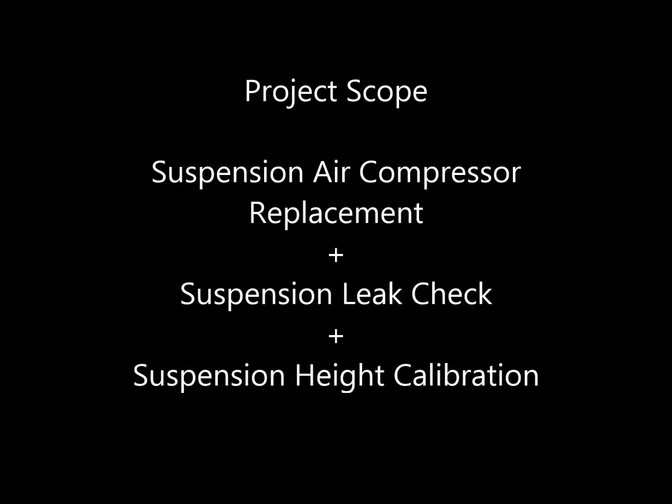My name is Dan, and in this video we will be working on a 2016 Land Rover LR4. We will be replacing the air compressor for the air suspension system. I will show you all the tools and all the torques and all the little bitty tricks and things we learn along the way so that you can do this project and do it correctly.

And I can already tell you that the diagnosis for this thing is really strange. We're finding things that really should never ever happen. So hang on, here we go.

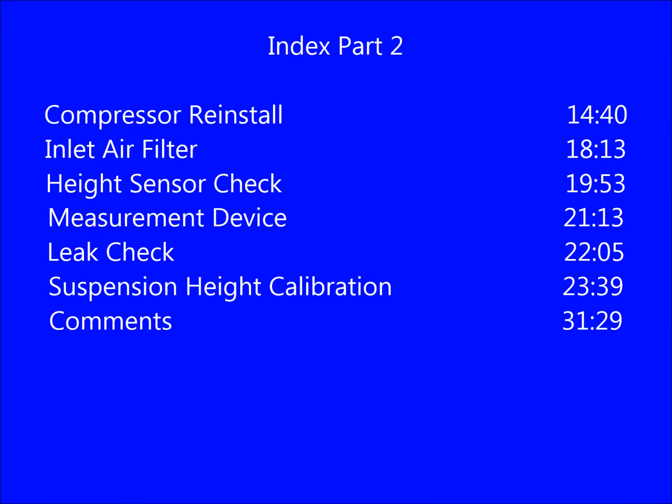Just a quick word about buying the parts. Be sure to understand what's in your truck before you buy your new parts. So the earlier trucks came with Hitachi pumps, and somewhere around 2012, 2013, they transitioned over to AMKs. Rover tells me that if you buy from them and you give them your VIN number, they will make sure you get the appropriate pump for your truck.

But if you're buying at one of our other vendors, where of course it's a lot cheaper, you need to know what you've already got. So if you're changing like for like, Hitachi for Hitachi or AMK for AMK, that's cool, away you go. But if you're changing brands, you need to make sure that you get all the new mounting brackets, because the mounting brackets are different. And if you change brands, you need to get a new relay, and you need to reflash the software. And to reflash the software, you need the IID tool.

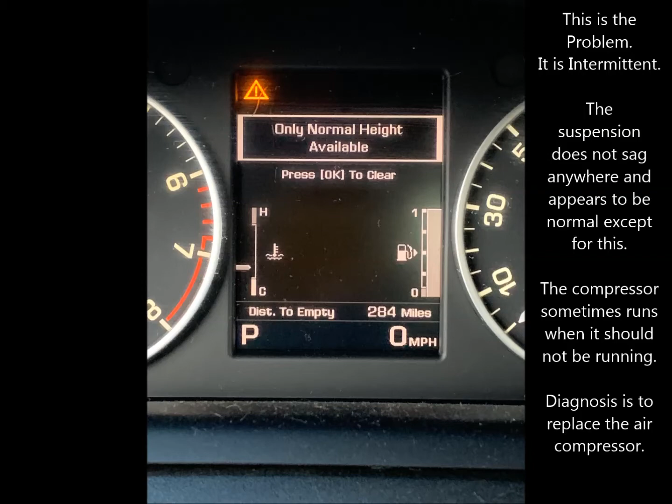Well, that's a surprise. Okay, so right now we are just doing a preliminary diagnostic. We just want to take a look at the pump. So to do that, just to get oriented, this is driver's side rear. When we do the actual pump, this wheel needs to come off. But to take a look at what's down there, we can do this real quick.

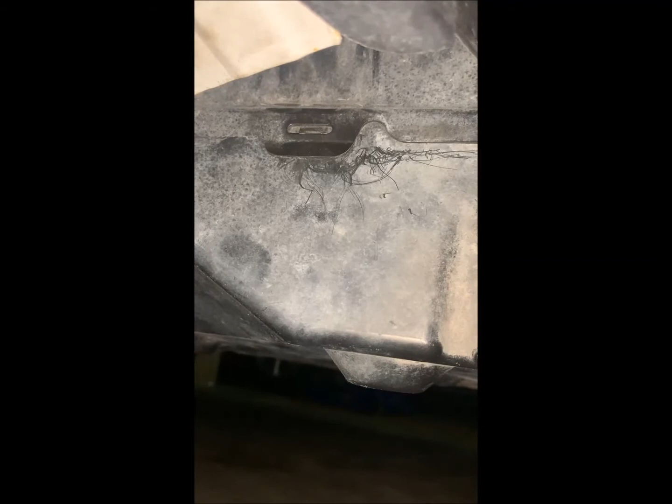Here's the case, and you cannot see it. Up there near that sticker, there's a bolt. Down here in the middle, shooting straight up, there's a bolt. And then around the back, you can see it right there. There's another bolt. And then there's these little clips. There's 5 or 6 of those clips around as we go. And let's just pop that off and see what's under here.

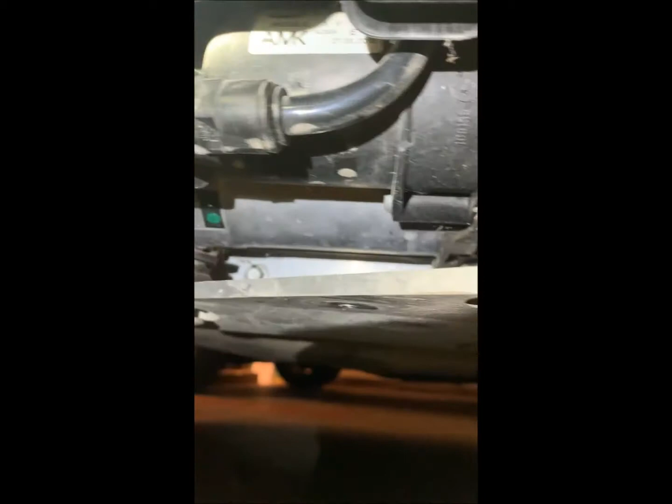Now it's interesting, I just showed you that the software comes up as Hitachi. And what do you think that says? That is most interesting. Let's go take a look and see what relay is up front.

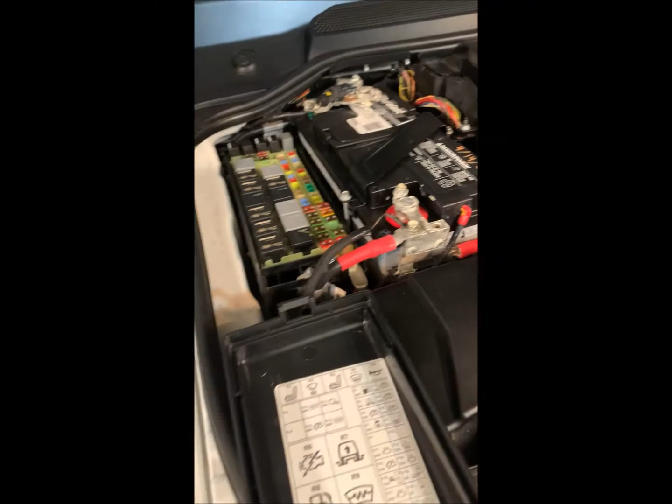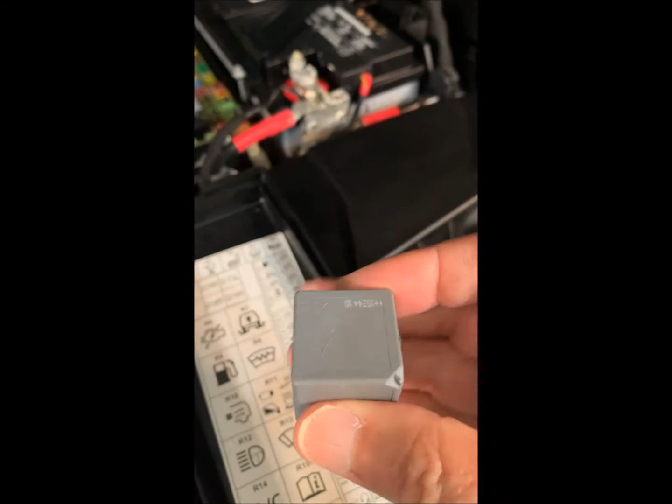Okay, so we've taken the cover off the battery and the fuse boxes. Here's our fuse box diagram. And you can see right there where it says R7, that's going to be the relay. And come up here, and right there where that relay is missing, that's our relay. Here it is in my hand. And this is the orientation that goes back in. This is the correct relay for the AMK compressor as near as I can determine. It's a 70 amp. There we go, 70 amp relay.

So that leaves us with the conclusion that either the software in the tool is incorrect or the software in the truck is incorrect. So now we move on and we talk to the folks who made the tool and see what they have to say. Okay, so we just learned that the truck believes it has a Hitachi compressor in it, and we know that's not true because we can take a look and see that it's an AMK. That's a real surprise, and I really can't figure out how that happened, and neither can anybody else.

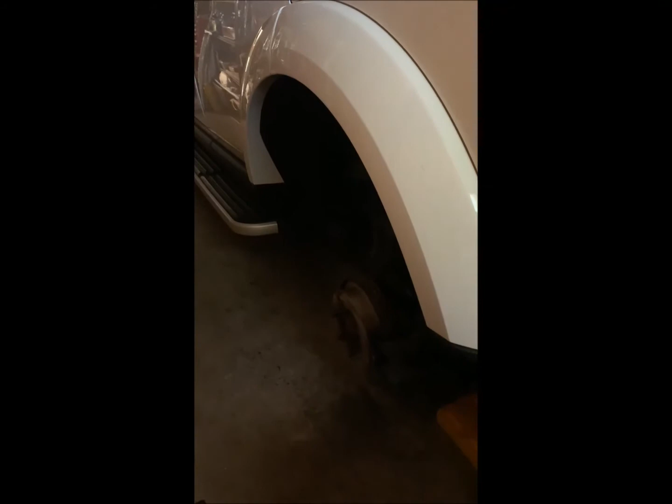So we are ready to start, and the vehicle has been jacked up and the wheel removed, and we are ready to go. I'm assuming you know how to jack up a Rover, but in case you don't, you put it down into access height and then lock it down. And then, of course, we are inside, so we can use the floor jack. And I have 2 jack stands underneath it today.

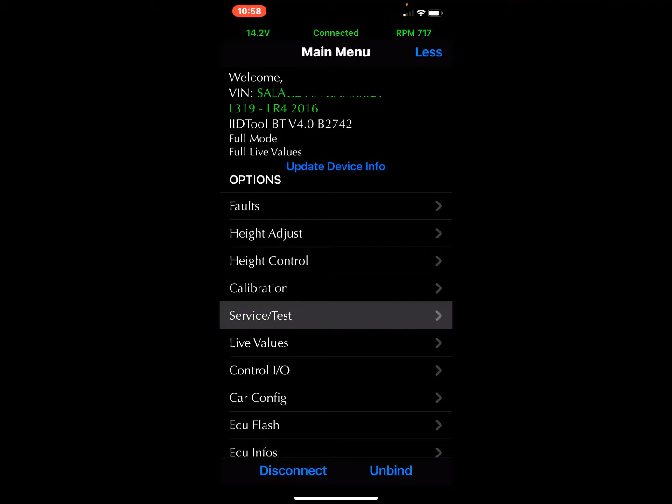Okay, our first step is to depressurize the entire system so we can open those airlines. I have not done this before, so let's give it a try. Okay, up here in the main menu on the top right, it says More. It beeps a suspension fault. And we're going to do service test, suspension, deflate. Yes.

Okay, looks good. You can see where that relay is missing. Take out the relay. Let's take off the case. And there again, there's 3 bolts. This is the one on the front. Here's the one underneath. And we've already seen the one in the back.

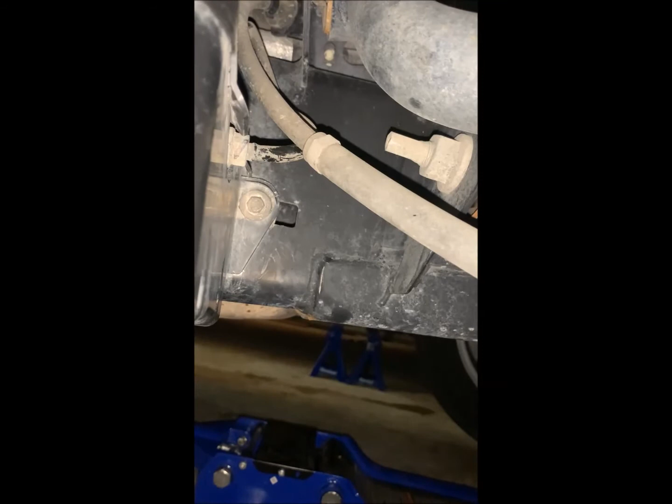These are all 10 millimeters and 9 Newton meters. 10 millimeters, 9 Newton meters. This is the only torque spec for this project that I can find in the owner's manual.

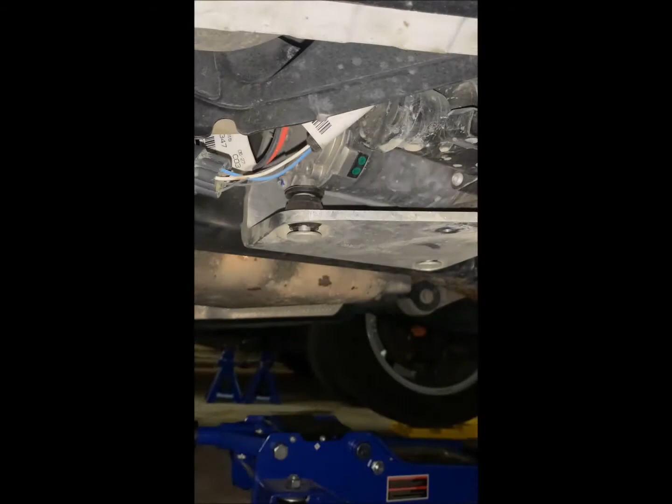Okay, so here we are underneath. There's the compressor. We have 2 electrical connectors, and these are not too bad. We push in right here on this one, and on this one here, we push in right there.

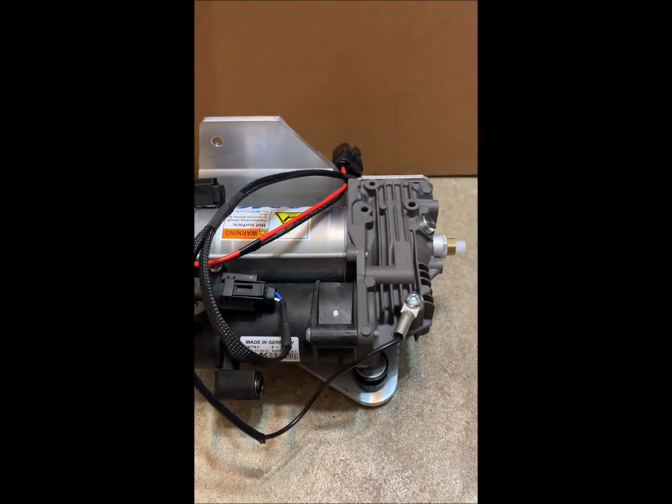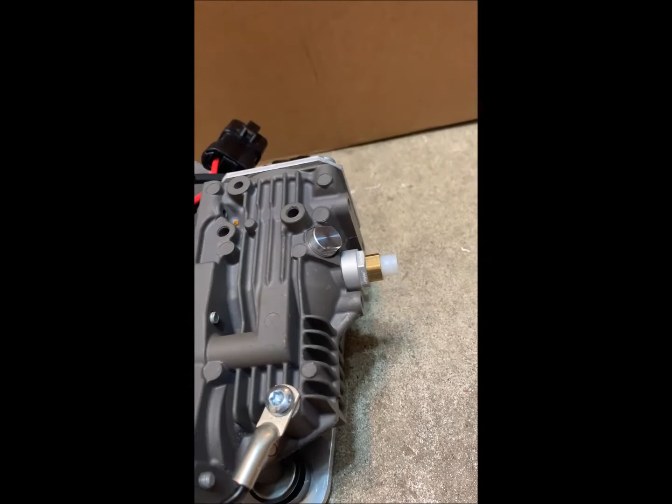Well, let's take a look at the physical connections here on the pump. So there are 3 airlines that connect. There's one here. This is 14 millimeters. There's the one there. That's 12 millimeters. And then there's this one here. And that's just a slide fit.

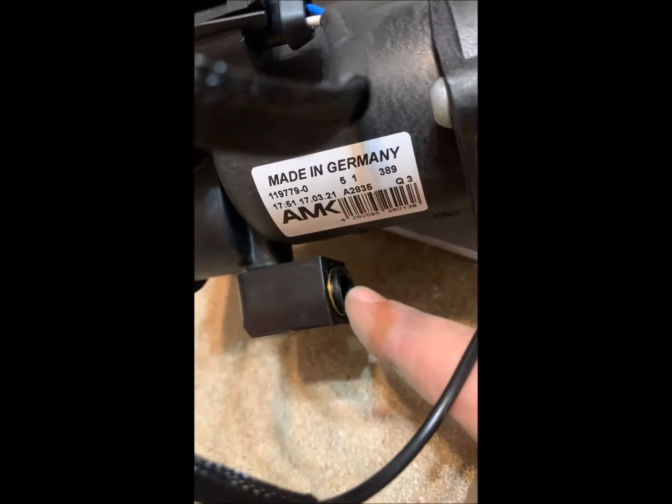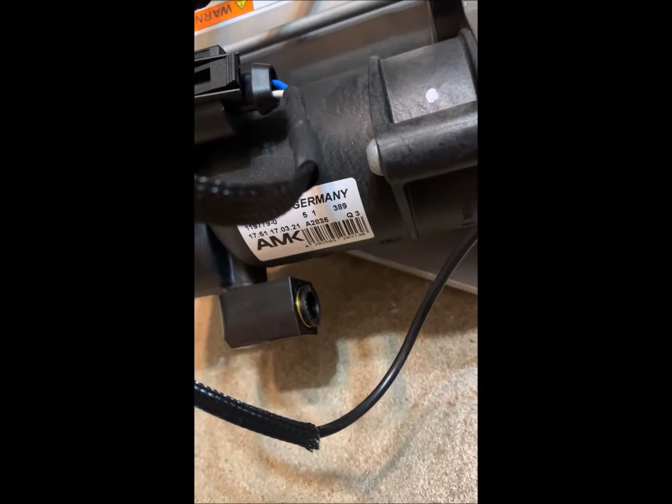And the way these come apart is you push in on this black ring, push in on that, at the same time you pull the hose out. And then that pops out. And that's not too bad. And I'm going to be very careful with making sure we don't get any dirt in our lines.

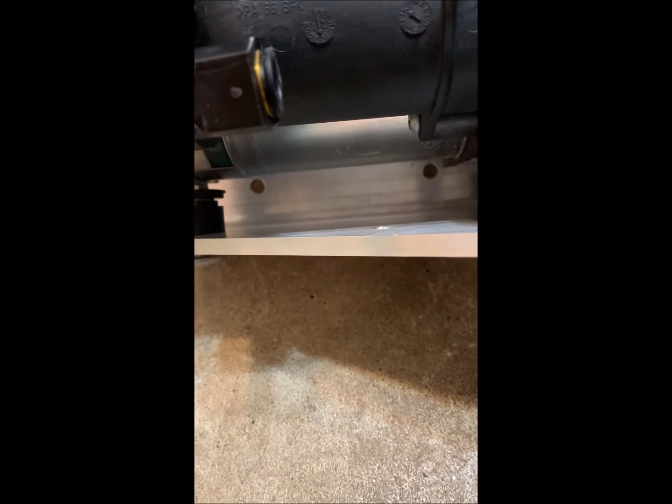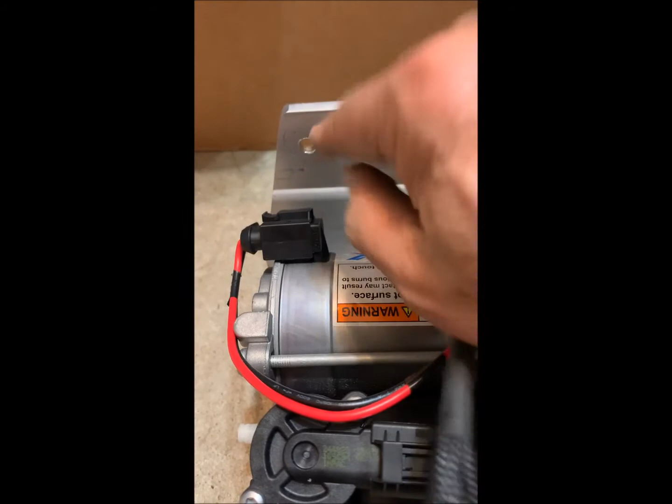Then for the bolts, there's 3 bolts that hold the bracket to the frame. These 2 down here are easy enough to get at with a socket on an extension. And these are 10 millimeters. This one here, though, is proving to be very difficult to get at because we have the top cover sitting in here and it's tight.

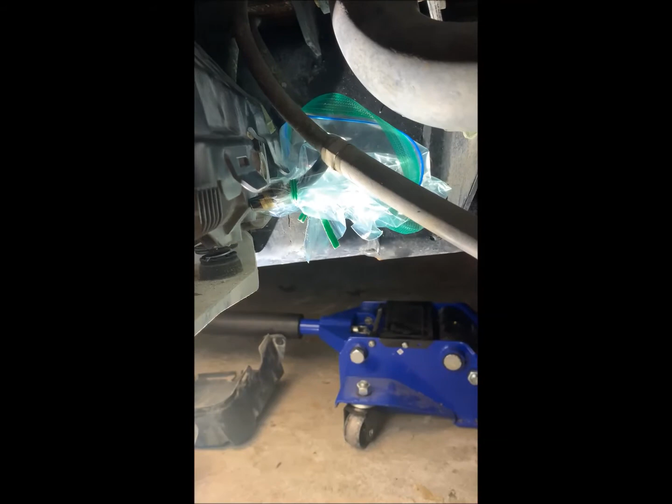So I think I'm going to need to go to the hardware store to be able to reinstall this. I'm going to get a 10 millimeter with a built-in ratchet head, and hopefully that will do the trick. Okay, the airlines come off very easily, and I don't want anything in my airlines, so those are covered up with some plastic and some zippy ties.

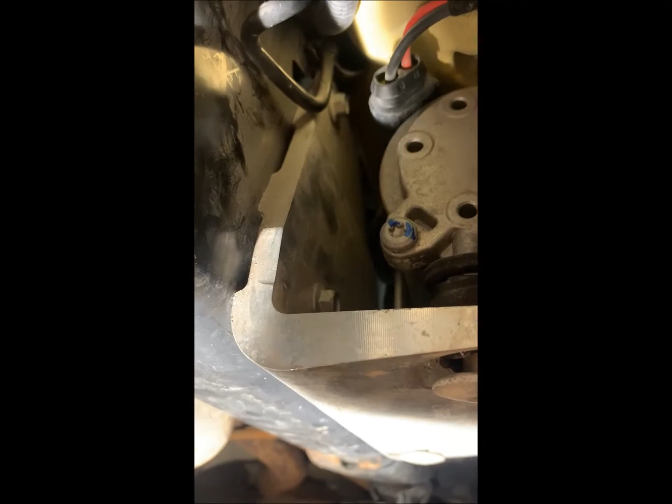So here we are attempting to take the bracket off, and it's not too bad. Those 2 bottom ones that you can see, I can get at from the outside with a socket. It's not a big deal. But that top one, there's no space to get in there. Even with a little bitty socket, you're not going to get on that. I just can't get in there. It takes a 10 millimeter. I can get a 10 millimeter box wrench on there.

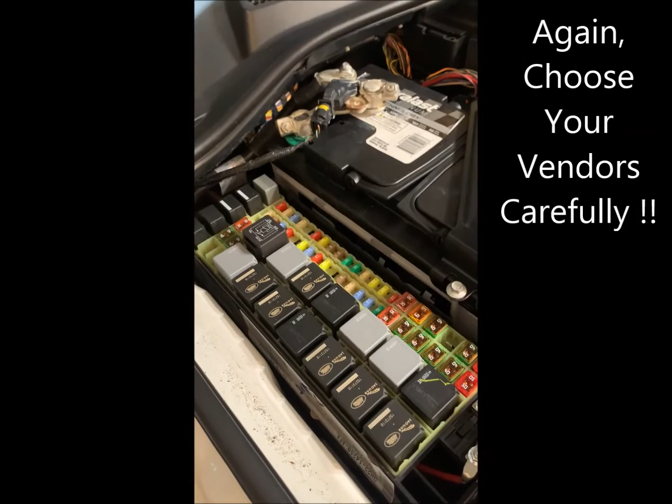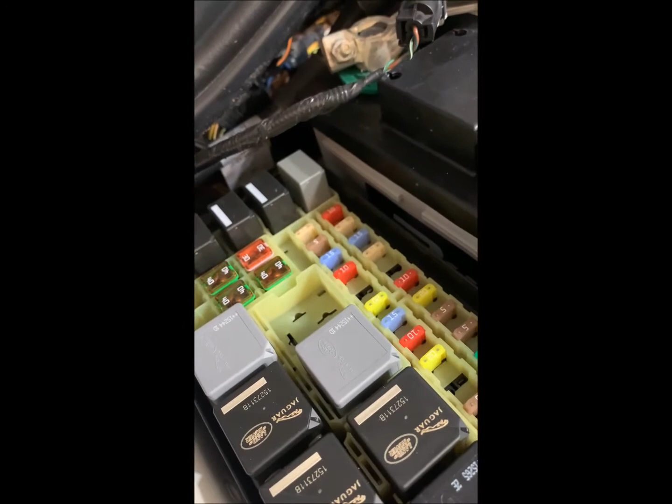Well, it's time to reinstall the relay, and this is most interesting. This is the relay that our vendor gave us, and it does not physically fit. So you can see right there that little extra bit of plastic on the side interferes with the case. And I suppose you could cut that off, but I don't feel like it. So I'm just going to go ahead and reinstall the original one.

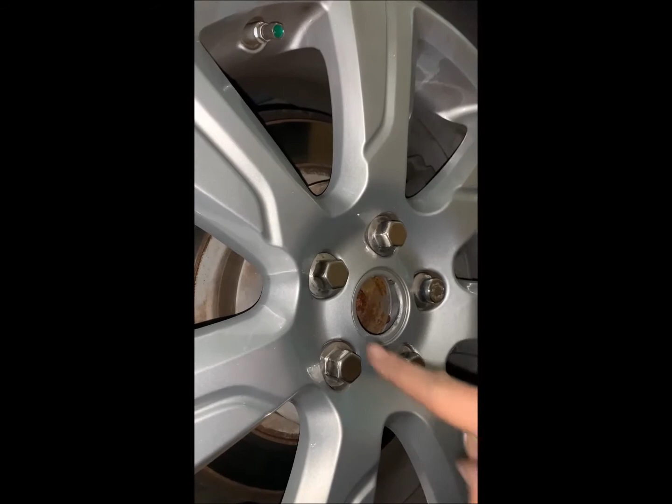Okay, so everything is reinstalled, everything's buttoned up, the wheel is reinstalled. These are 140 Newton meters. And you'll notice I have taken this off before I installed the wheel. We'll talk about that later.

And the clearance, it's hard to see, but I think the clearance is about 1.5 inches, maybe 2 inches at most. Up there. Remember, the system is fully depressurized, so it's lower than access height. And down here, here's our new cover, and there's our floor jack. And again, that's 1.5 inches, maybe 2 inches of clearance there.

Okay, well, I really hope that our diagnosis was correct and that everything fires up. So here we are back in the vehicle, and I see the keys over there, so we're good to go. So let's find out. Okay, it says air suspension not in customer mode. Don't know what that means. Don't quite know how to clear that. Well, let's figure it out.

Okay, well, let's mess around with this and see if we can figure out how we get this back to normal. Oops, needs to be running. Okay, so service test, suspension, re-enable, I think yes, enable, confirm required suspension height, push up or down to continue to reactivate. So that's our controls over here.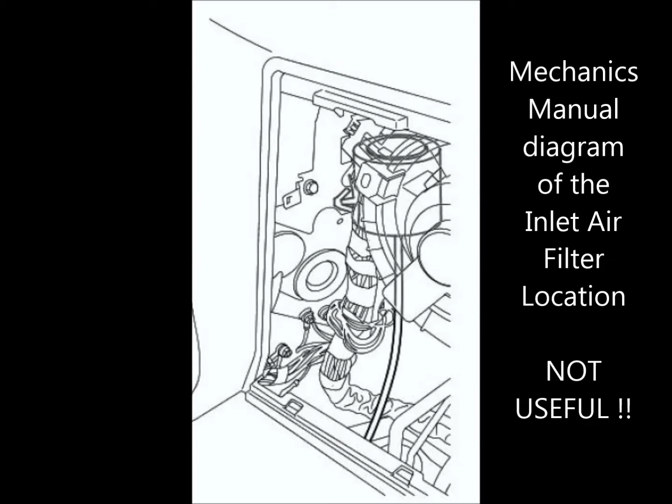Okay, so let's just take a look at the inlet air filter for our compressor. And it lives back here on the driver's side in the back. The access panel is off, and the video is going to be bumpy because it's really hard to get the phone back in there to take a look at it. And you might need to replace that filter if and when it gets dirty.

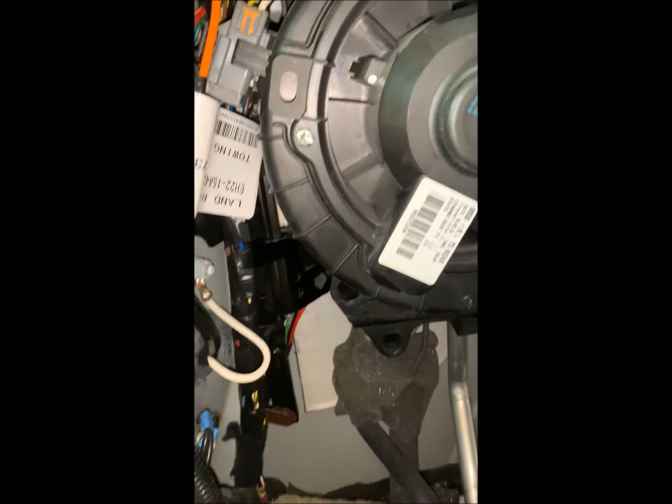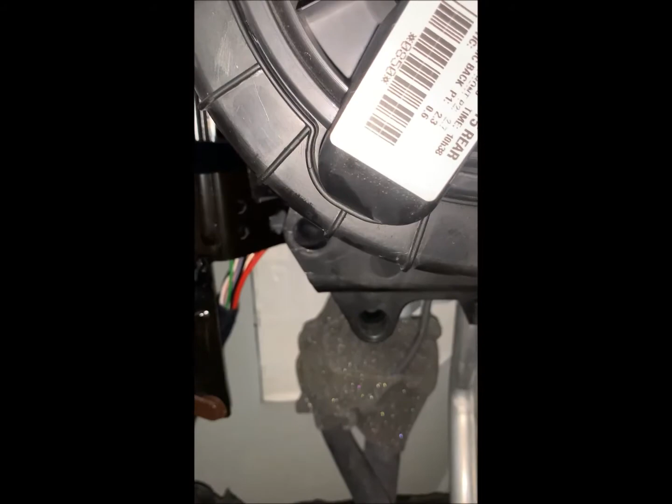And as you can see here, this is very, very clean. And if and when the foam that makes up the filter starts to disintegrate and degrade. Well, there's some other foam doing another job back here, and it looks just fine. So I'm going to assume that our filter is fine. So I'm going to try and show you where that is now.

So it's here, this is outer wall. And then you turn towards the back, and you go up. And it's way back up in there. I'm going to try and snake the phone in and see if we can give you a look. And it's a bumpy ride, and it's hard to get this so you can see anything.

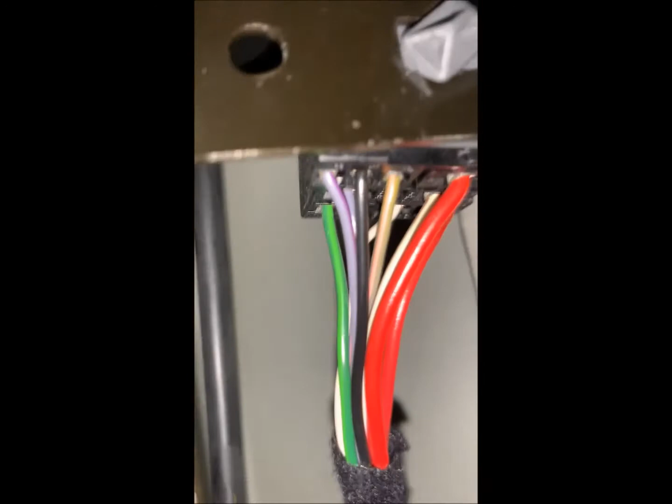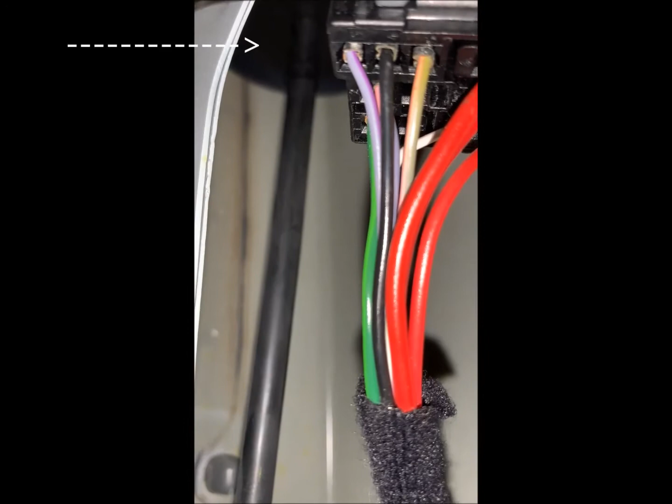So there's the tube, that black tube. And if I get the phone in a little bit more, you can see up there, there's a black bit up at the top of the tube. That's the air filter. And you can get your hand back in there, and you can get at it. But it's pretty hidden. So that's where it is.

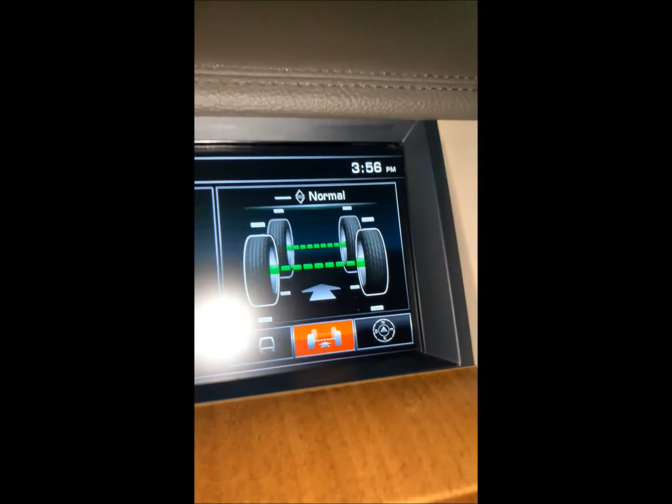Okay, so now let's do a first level check of our height sensors. Get it started. Okay, so we're at the home menu, and now we want to go to the right, come over here where it says 4x4. And we can take a look. And you see these 4 white bars up there above the wheels. And they look like they're reflective of reality.

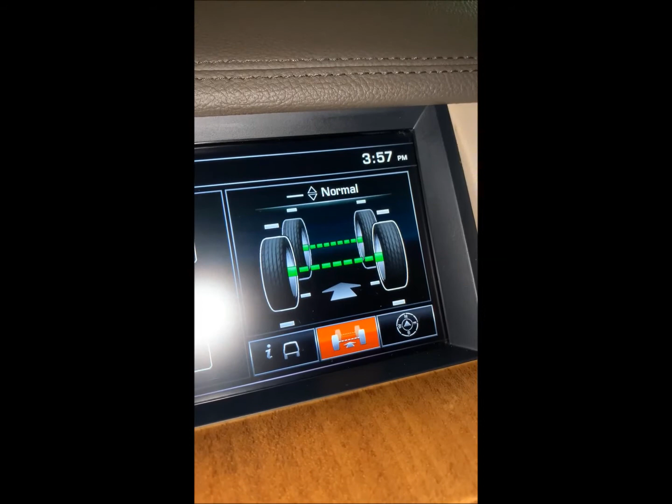So if you have a bad height sensor, a noisy one, those will be bouncing around and moving around a lot. Or if you're looking at the vehicle and the vehicle is level and one of those height sensors is not where it needs to be, say it's way down on the tire or way up, showing you something that's not in reflection of reality, then you know you have a bad height sensor. You can also use your tool and you can go in and measure the voltages at each of those sensors, but that's a whole nother level of diagnostics and we're not going to go into that here.

So let's talk about our measurement device. So as you can see, this is a flexible tape measure. This comes out of the sewing kit and it is calibrated in metric units. And depending on what we're doing, we're measuring from the bottom of the fender well to the center of the hub, or from the bottom of the fender well all the way down to the ground, depending if we're doing a height calibration or a leak check.

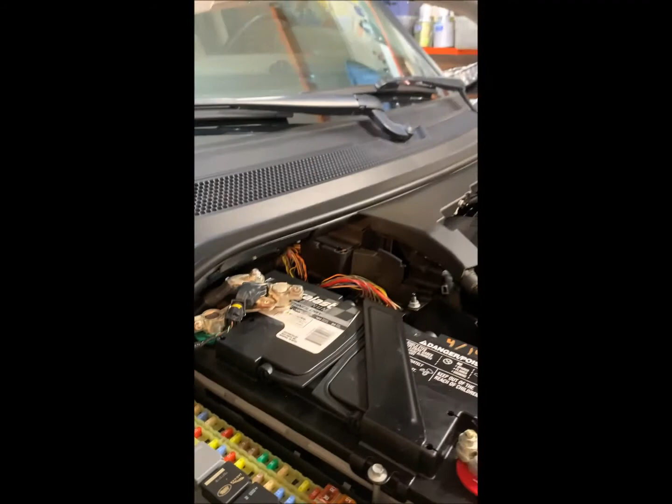Then with all that done, come on over here to the fuses. Now what we had been pulling before is up here. It's a relay for the pump. What we want to do is disable the entire system, and that's a fuse. That's the third one up right there, the one that's missing. And that is because these wake up 2 hours after they're shut off and every 6 hours after that to make height adjustments, and we do not want that to happen.

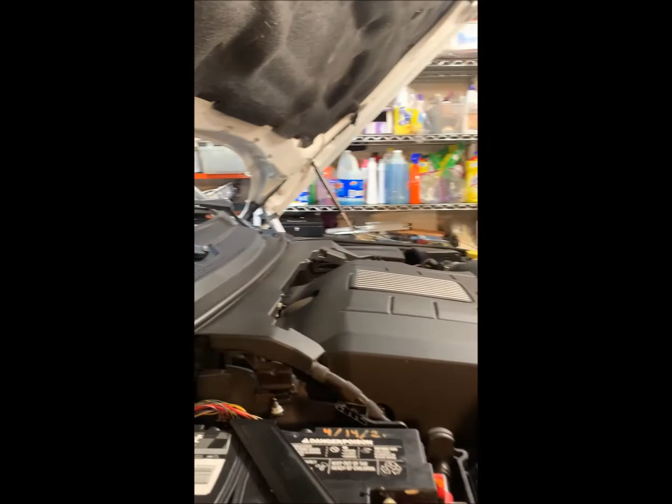So now that the fuse is out, you can go ahead and close the door if you want, and go around and measure the height on all 4 wheels. You know the spot between the fender and, in this case, just the ground. Write down your numbers. Leave it sit overnight and then come back in the morning and measure those heights again. And if everything is good as it is here, all your heights will match and you do not have a leak. And on we go.

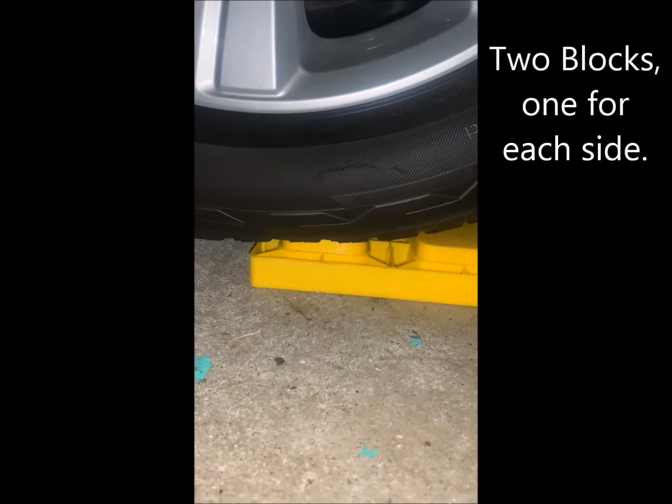So I have measured this up, and I've determined that across the wheelbase of this truck, it is a 1-inch drop from front to back. And we have the vehicle up on a leveling block, a 1-inch leveling block. So now it is flat and level.

So the next step is to set the suspension to tight tolerance mode. In normal mode, which is what we use every day, the suspension can be as much as a centimeter away from its set point on any particular corner, and will not be adjusted until it exceeds a centimeter. In tight tolerance mode, that's set to 3 millimeters. So we want to set the tight tolerance mode before we do the calibration. So let's get it started.

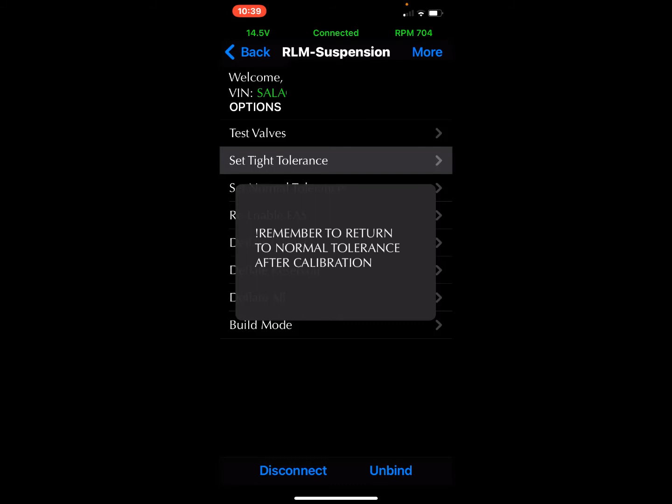Search. And we want to do service test. Suspension. Set tight tolerance. Yes. Back. And now we can do calibration, suspension. And I'll step away here for a second because I need to show you something in the manual.

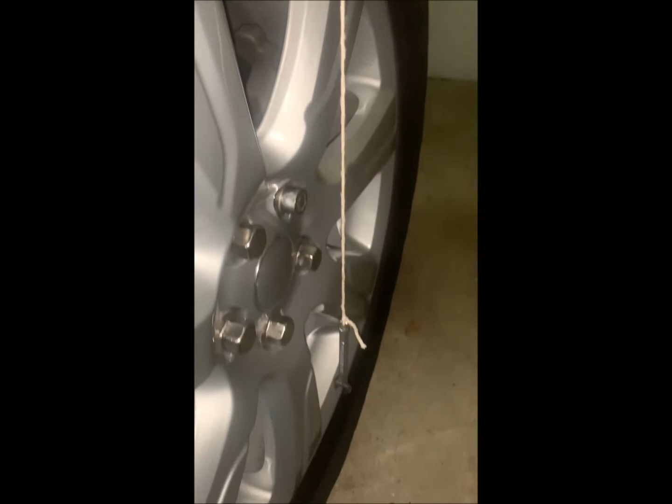So the next step is to understand our measurements, and I want to show you this, and then you can decide what you want to do. So here we have a plumb bob hanging down. I'm on the back end. Nice metric plumb bob because it's a metric wrench, right? So this distance here between the center of the hub and our plumb bob is 53 millimeters, and I'll show you why that's important.

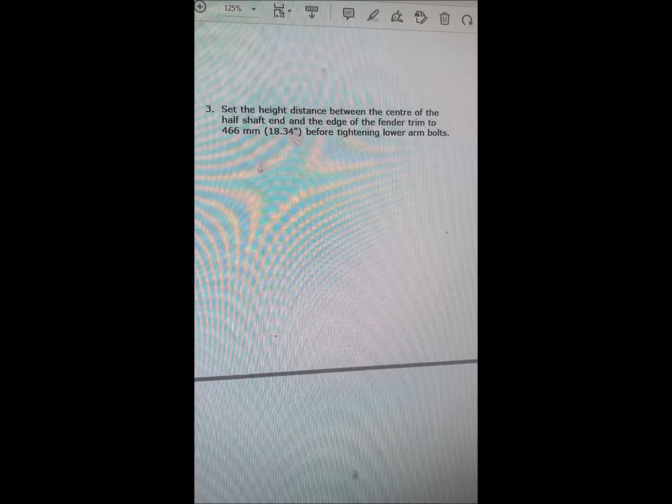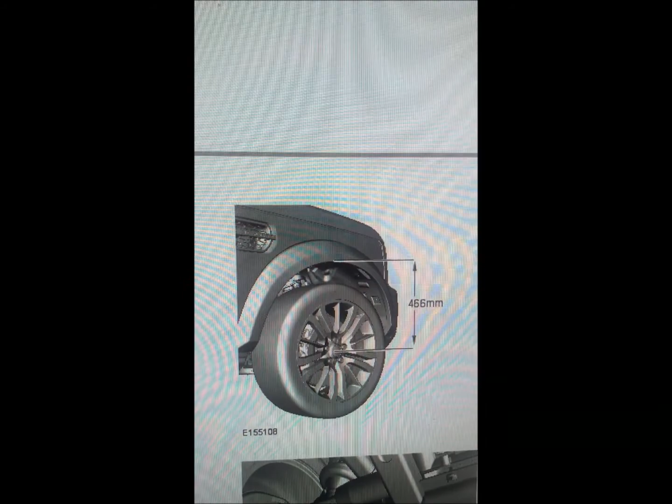Okay, so here we are looking at the mechanics manual, and in this section of the manual they are discussing the front suspension, and it says to set the height from the center of the hub to the edge of the fender trim to 466 millimeters. Sounds straightforward enough, but remember that 53 millimeters, right? And here is the drawing that goes with that, and that's pretty clear too, but this is saying something different. This is measuring between those two parallel lines at 466 millimeters.

So there's our 466, and remember our 53, and you do the math, remember a squared plus b squared equals c squared, that works out to 469 millimeters. You know, 3 millimeters, is that important? Yeah, it's up to you.

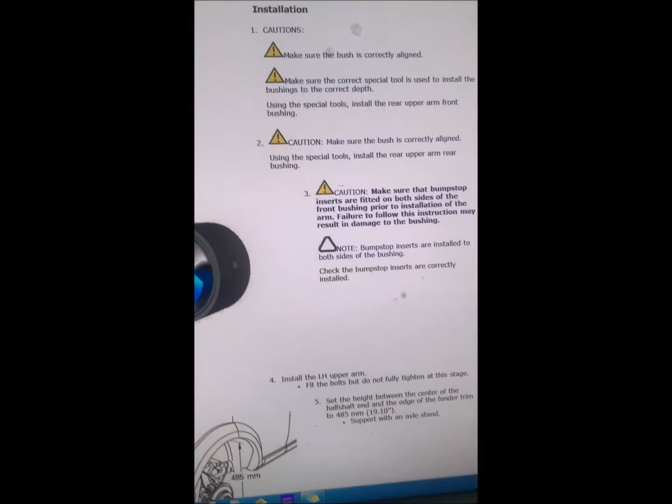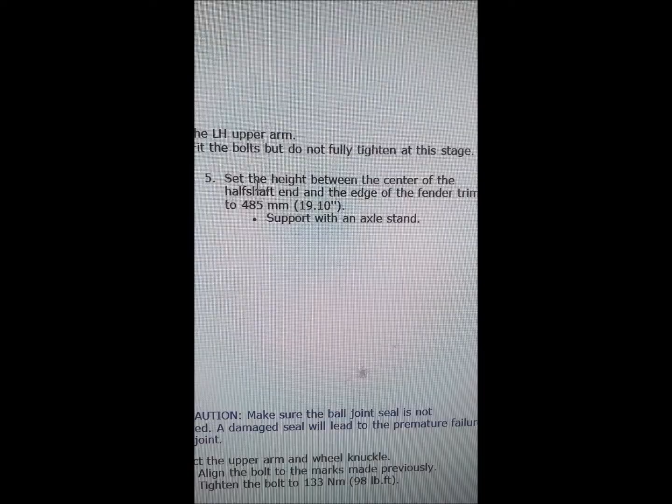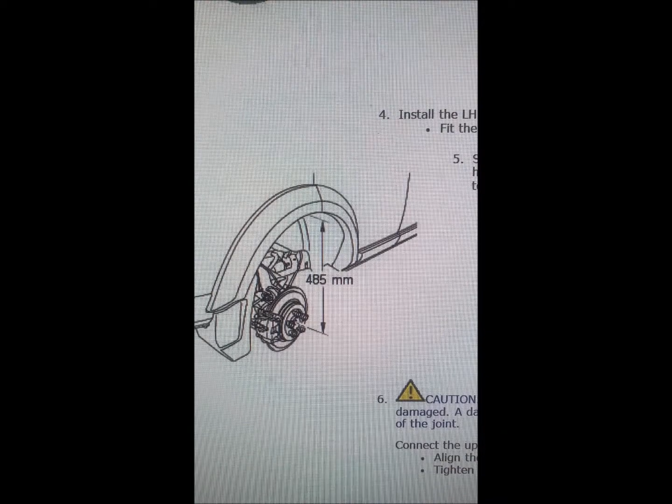So now let's pop back up here to the manual, and again it says, now we're in the section talking about the back end. It says set the height between the hub and the edge of the fender trim to 485 millimeters. And again, the drawing shows between the two parallel lines, 485. And I've measured this one up, and again, 53 millimeters is the offset.

So again, this is the rear, 485, 53, and a squared plus b squared equals c squared, and you get 488. So again, 3 millimeters different. Important? I don't know, but I'm going to use the 488 and the 469.

We need to measure from the center of the hub to the bottom of the wheel well. So we need to know exactly where the center is on this. And I have measured this up multiple times, and I always get the same answer. So you take this side of the V, here's the V, the outside side on the left, that line, and then the top of the bottom line of text. Where those two lines intersect is the exact center on that.

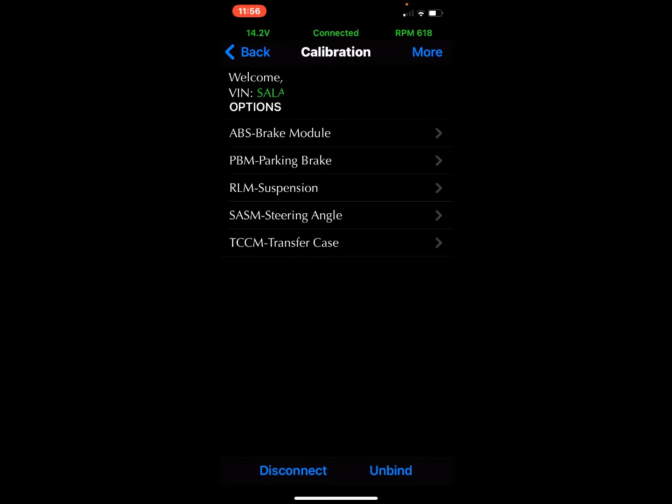And we're not going to count the little flare on the edge of the V. So again, this line here and this line, oh, there it is, this line here. Okay, so let's go ahead and work our way around the vehicle. We're doing calibration on the suspension. This has verbiage in here that I'm just going to blow through really quick.

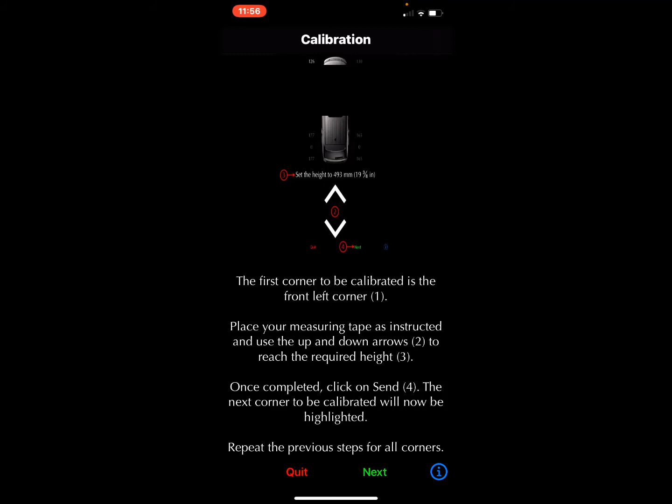Okay, so it wants us to be at the front driver's side. And these numbers don't really mean anything. They're just numbers from the software. So we just measure on that spot in the center of the hub. It's right there. The magic number is 469. And you know it's a 470. Next. There we go. Now go over to the passenger side.

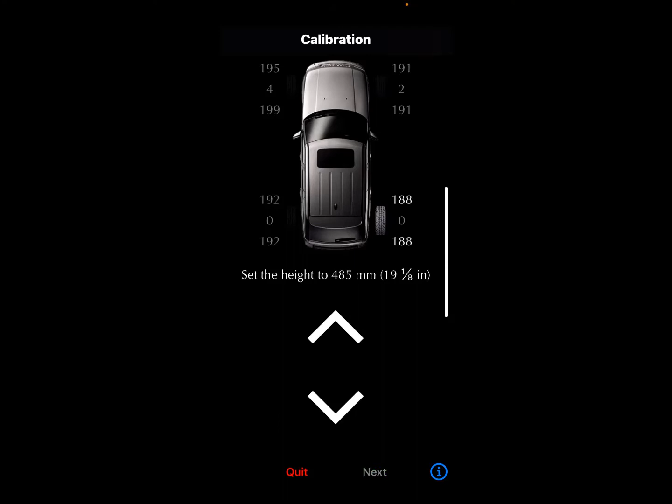So if you go up just a touch, ooh, way too much. 470. Next. Passenger rear, remember this was supposed to be 488. 490, it's supposed to be 488. Close enough? This one is high.

490. And that's how long it takes to do the entire vehicle, really quick. Now, me being me, I'm going to go around and do it again and double check. And that's it. Okay, so now let's not forget that we are still in tight tolerance mode, and that is not a user mode. So we need to disconnect from tight tolerance mode. It needs to be running.

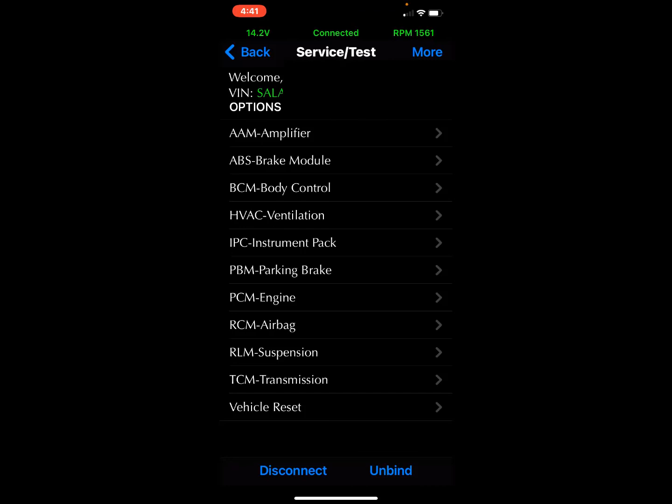Once again, it's under service test. Suspension. Set normal tolerance. Yes.

Okay, so it has been a couple of weeks and a couple hundred miles, and everything is looking really good. So I'm going to go ahead and declare this project complete. So obviously, that's a lot of information for 3 bolts and 3 air connections. You can make that project as involved or as simple as you would like. Obviously, if you have the tool, you can do a lot of nice diagnostics and nice system checks. If you don't have the tool, just really be careful when you depressurize the system, because there's a lot of pressure in there and you need to be safe.